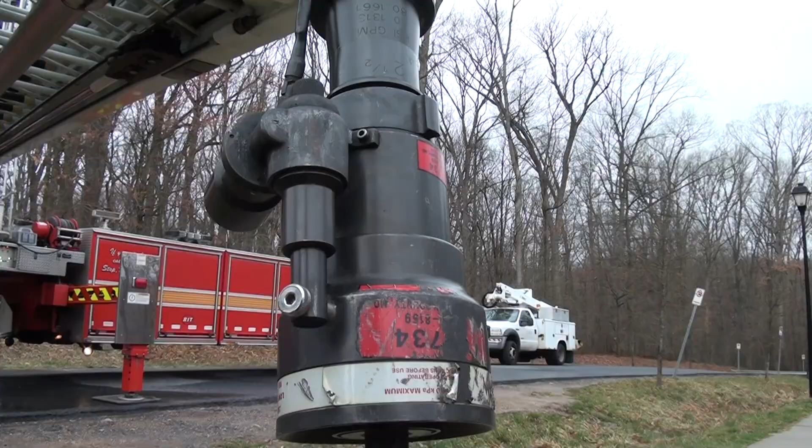In this video, we will discuss the various master stream devices utilized by the Montgomery County Fire Rescue Service. We will review what qualifies as a master stream, the types of master streams to include advantages and disadvantages of each, how to supply master stream devices, the differences in nozzle tips, and some operational best practices.

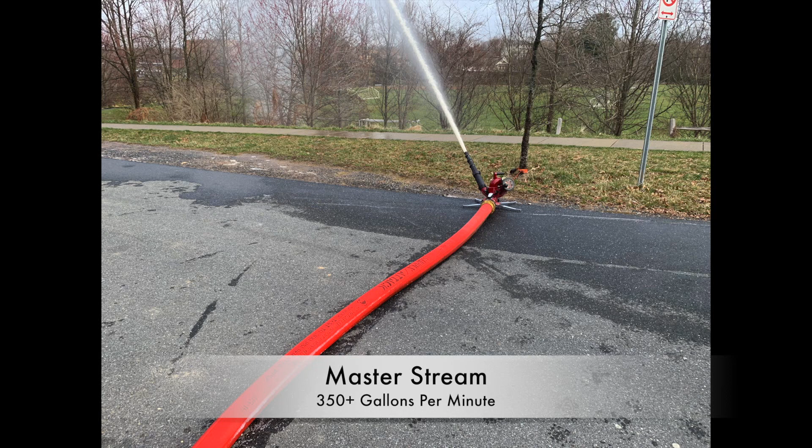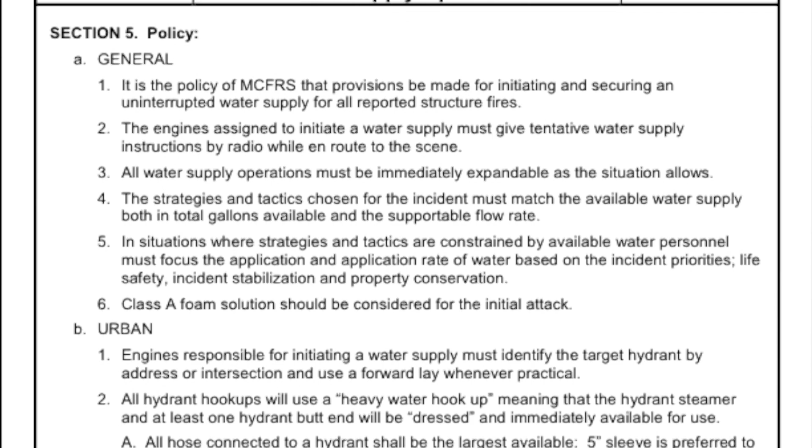According to the NFPA, a master stream is a stream of water flowing at least 350 gallons per minute. Master streams are ideal for when large amounts of water need to be quickly applied to burning surfaces or when arriving companies are faced with advanced, rapidly moving fire conditions. Officers and drivers are reminded that the IRP on water supply states that dual supply lines must be considered when master streams will be required for on-scene operations.

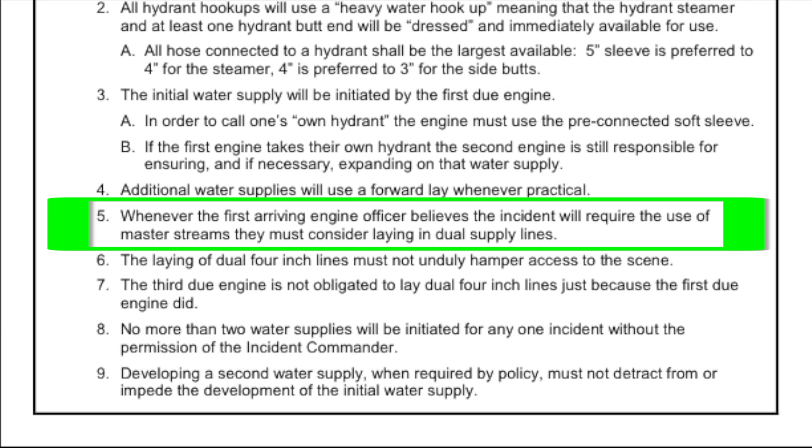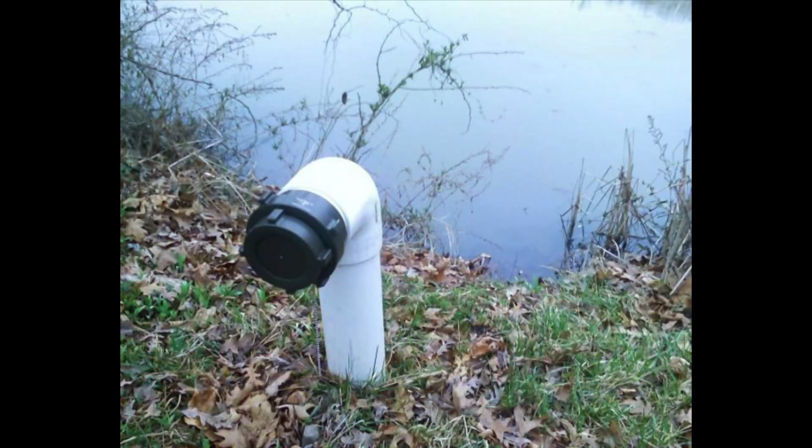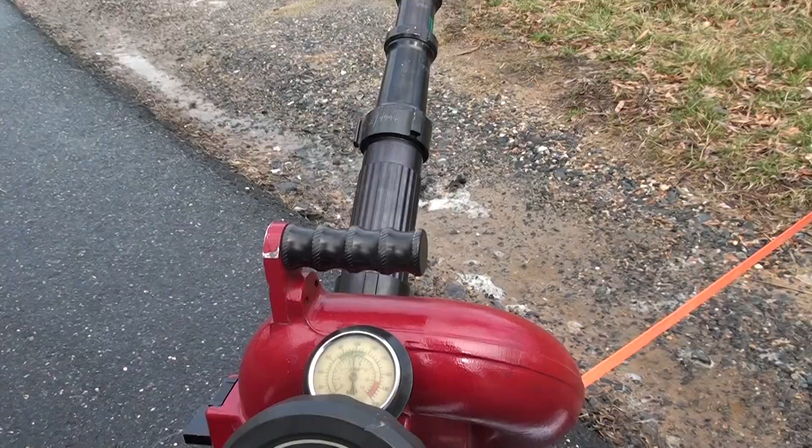Remember, strategies and tactics chosen for the incident must also match the available water supply. In a rural, non-hydranted area, a large master stream may not be practical until a continuous water supply is established. When connected to a hydrant, that hydrant may not have the gallons per minute to support multiple master streams, or a combination of a master stream and hand lines. Strategy and tactics should remain flexible to meet the unique challenges of each incident.

The various types of master streams include fixed, elevated, and portable. Fixed master streams are devices mounted to apparatus, such as deck guns found on engine companies. Elevated master streams are aerial ladders that are supplied by engines, and water is flowed from the nozzles mounted on the aerial device. Portable master streams include a variety of appliances found on heavy apparatus around the county.

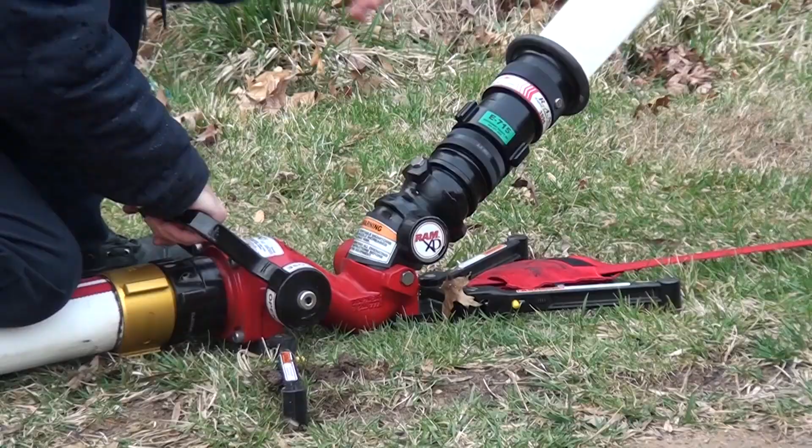Examples of these would include the Blitzfire, found on the Crimson engines, the Elkhart Ram, found on the Pierce Enforcer engines, and the Crossfire Monitor Base, found on various units throughout the county.

Advantages and disadvantages of master streams. Advantages. These master streams are able to deliver large quantities of water, up to 2,000 gallons per minute, when utilizing aerial towers. They have the ability to be used in both offensive and defensive fire suppression modes. They can be deployed and operated by one firefighter. In some instances, these streams can be left unattended.

They are very useful for exposure protection, cooling of large tanks, or rail cars involved in fire. They can be used to create a water barrier to control vapor release during hazardous material incidents. When used with a fog nozzle, these streams can be a useful tool for gross decontamination.

Disadvantages. Flowing large quantities of water into a structure adds a massive amount of weight to an already weakened and compromised structure. Along with the weight of the water being added to the structure, the force of the water being delivered into the structure can cause additional structural damage and instability. This may limit the ability to make entry inside.

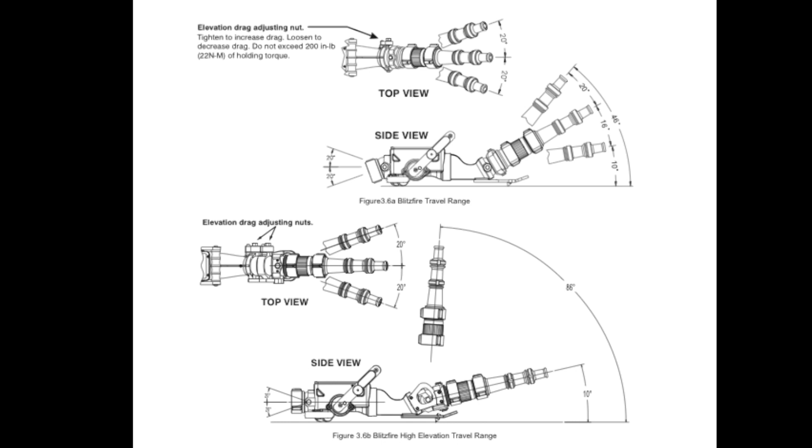Precautions. When utilizing a portable master stream device with an angle of delivery under 35 degrees, you increase the chance of a kickback if not properly secured. Many devices have safety features built in to reduce this likelihood. It is important to properly secure all nozzle tips on the device as they could become projectiles if not properly installed and tightened.

Supplying master stream devices. Depending on the incident and the type of device, the way in which it is supplied might be different. Fixed master stream devices, such as the deck gun, are supplied by the engine's fire pump and the various LDH intakes found on the unit. Elevated master streams are supplied by engine companies, pumping multiple 4-inch supply hoses into a large manifold, which is then connected to the ladder truck's waterway.

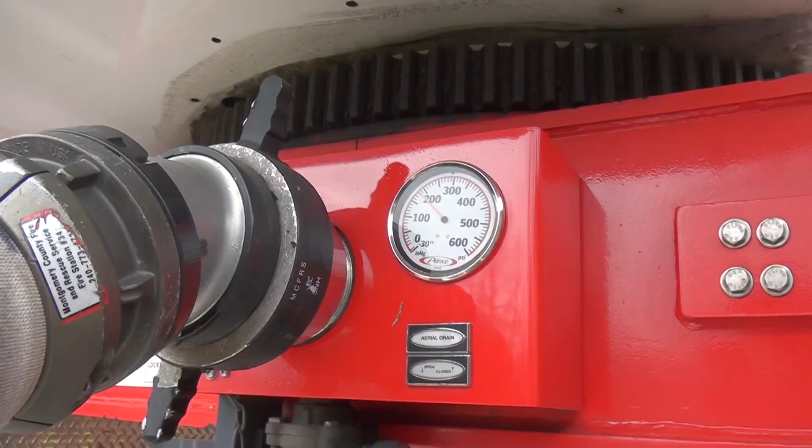Remember, it is important that the relief valve on the manifold or gate being used is properly set at 200 psi for correct flow of the aerial device.

On the Crimson engines, the Blitzfire is a pre-connected line off the rear and is supplied by 250 feet of 2.5-inch hose. While this combination is acceptable, companies should consider supplying the Blitzfire with 3-inch hose to maximize gallons per minute and increase effectiveness.

On the Pierce Arrow engines, the RAM is not pre-connected and must be built out. Like the Blitzfire, 3-inch hose is preferred for the RAM. The other portable master stream device in service on MCFRS units is the Task Force Tips Crossfire Monitor Base. This base is designed to receive the deck gun from the engines and is supplied by a single 4-inch hose.

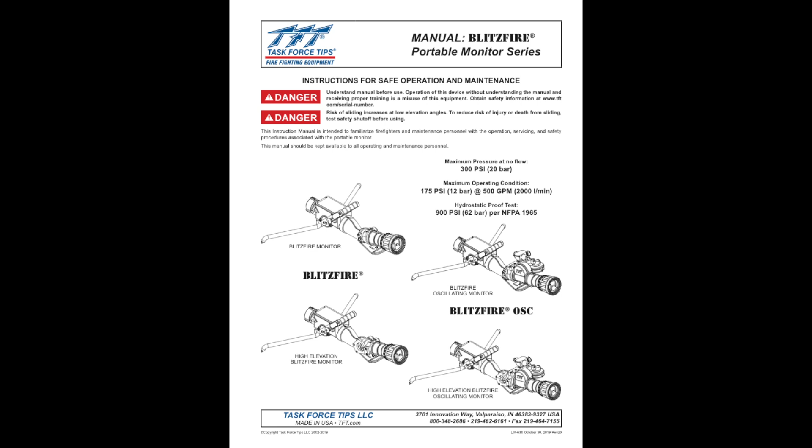Pump operators should know the limitations of the devices on their units and always follow manufacturers' recommendations for water flow and pressure. The forces involved with master stream devices make them extremely dangerous when not operated properly.

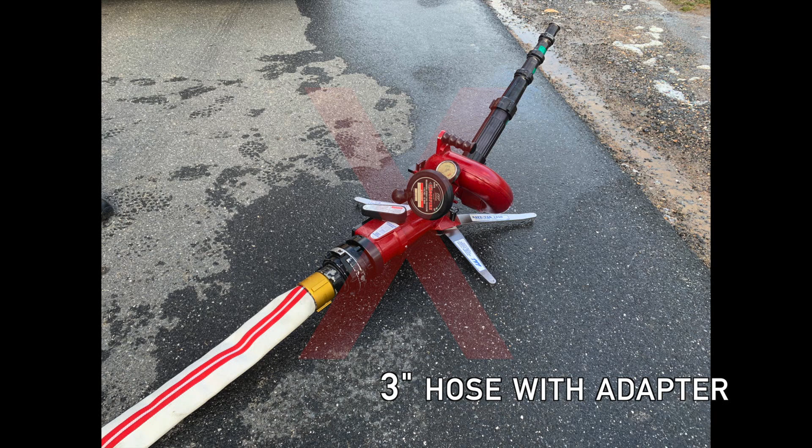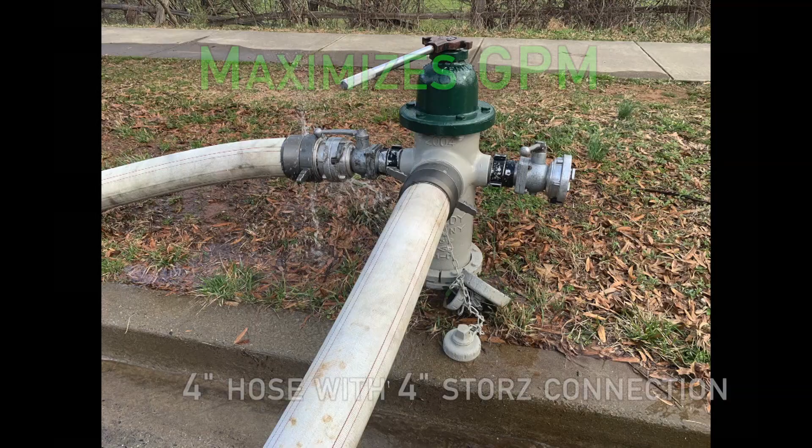Here are some tips to remember for supplying master stream devices. Use the largest size supply hose the appliance will accept. Ensure an adequate water supply to meet the needs of the incident and the device or devices. Think heavy water hookup or multiple engines on hydrants for multiple streams on large incidents. Place the device or aerial in a safe position, but in close proximity to the engine to reduce friction loss, thus maximizing flow.

Master stream nozzles. The smoothbore nozzle versus the fog nozzle. Each nozzle has its distinct advantages for different applications. Smoothbore nozzles have good penetration with good reach and distance, remembering that bigger tips do produce higher gallons per minute, but at a loss of range. Smoothbore nozzles are good at pushing or moving debris, and they're excellent for large volumes of water.

The fog nozzle is good for heat absorption and is good for exposure protection. It's an excellent choice for gross decontamination and other hazmat incidents. The fog nozzle provides for a larger coverage area than that of a smoothbore nozzle. Fog nozzle flows are dependent on manufacturer's specifics and recommendations, but in general, master streams utilizing fog nozzles should be pumped between 75 and 100 psi, which would provide a flow of 500 to 1200 gallons per minute.

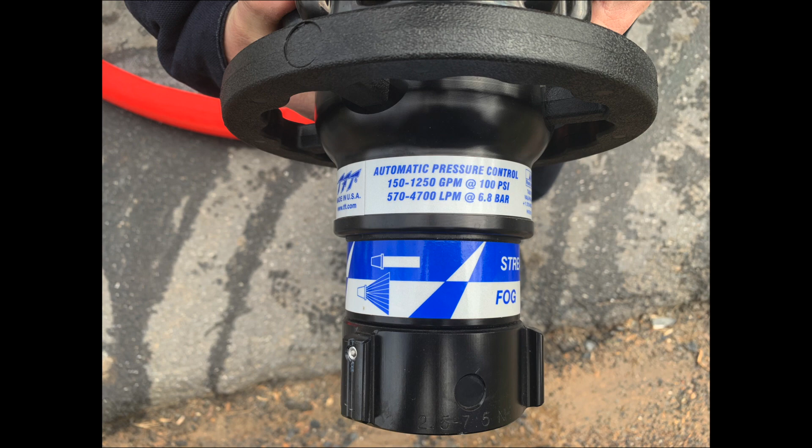Review the appliances on your unit to familiarize yourself with the operation and limitations of each of these devices.

Operational considerations. Never use master streams while crews are operating inside the structure. Master streams can be utilized in the offensive or defensive strategy. Portable master stream devices can be pre-connected or built out as an attack line. By removing the tip, crews can build an attack hand line from a master stream for mop-up after knocking down large volumes of fire.

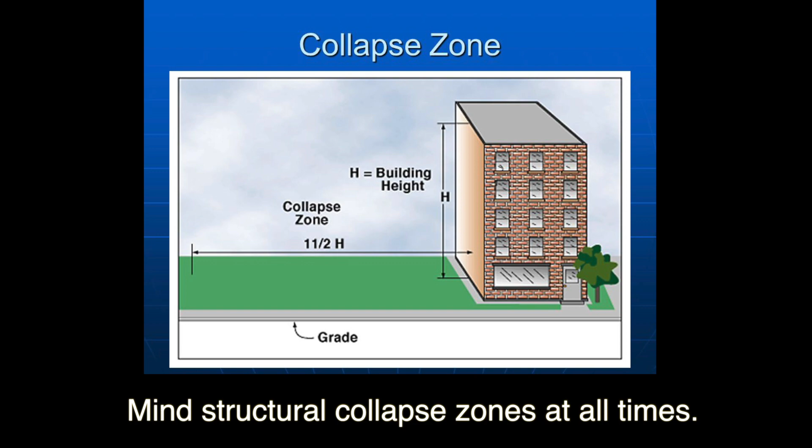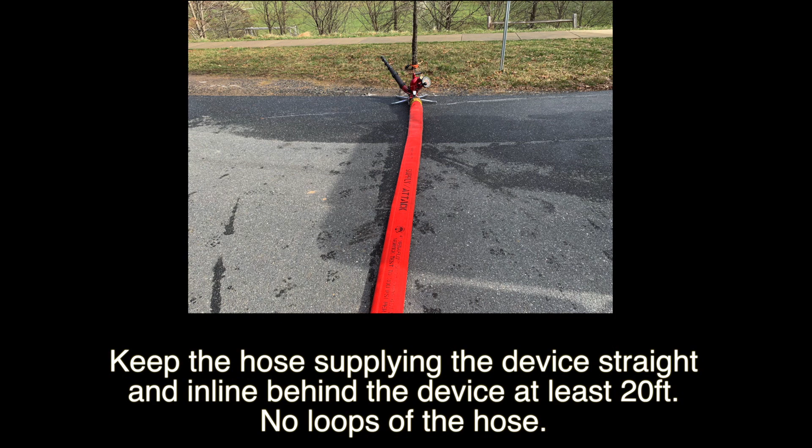When leading off with master streams and transitioning to interior attacks, officers must consider structural stability and the associated risks. Be mindful of structural collapse zones at all times. Keep the hose supplying the device straight and in line behind the device at least 20 feet. No loops of the hose. Always follow the manufacturer guidelines for use of various devices used by the MCFRS.

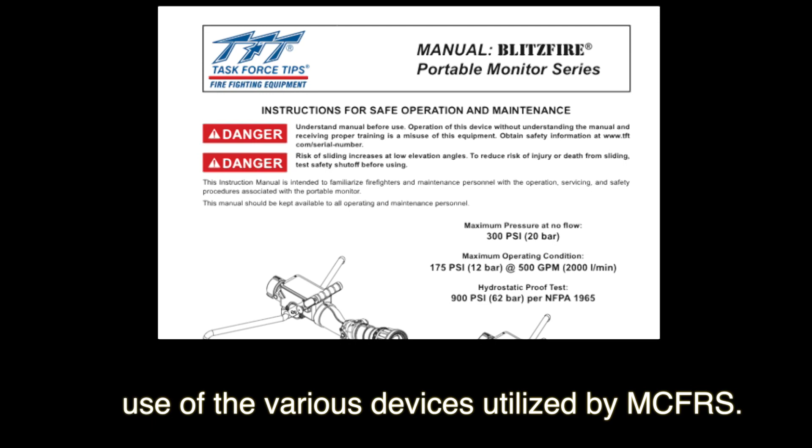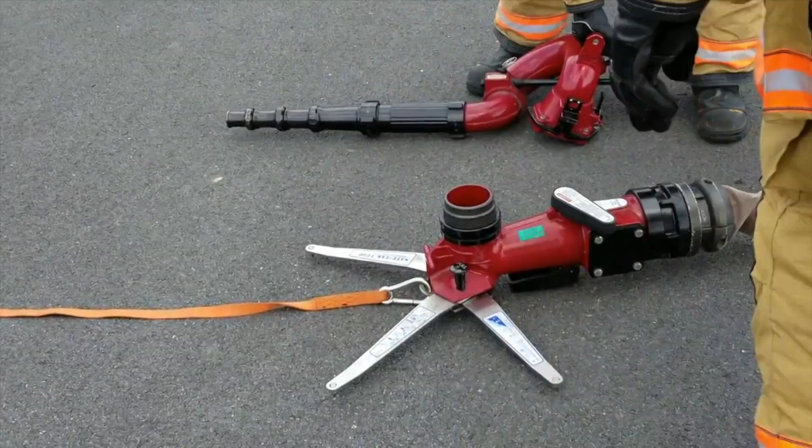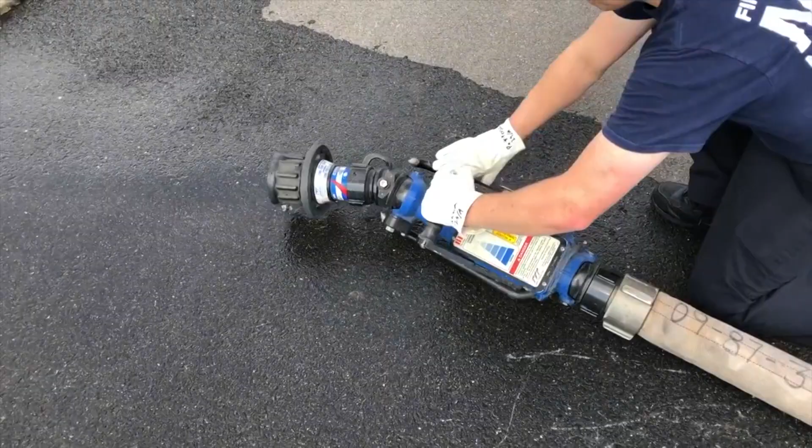Practical skills. Select an appropriate location that has a level, stable surface with the ability to secure a portable master stream device to a nearby sturdy object, if applicable. Safely deploy and set up all the master stream devices available at your company, following manufacturer guidelines and best business practices. Practice with the deck gun, the Blitzfire, the RAM, the Crossfire monitor, and an aerial master stream, if it's available to you. Review and discuss scenarios or target hazards within your response area that may present a need to utilize master stream devices.

This concludes this monthly basic training on the MCFRS master stream devices. All companies should become familiar with the various master stream devices in use throughout Montgomery County, and specifically those in use at their stations. Crews are encouraged to become proficient in deploying and using the various master stream devices at their stations. Companies should always refer to and follow the manufacturer's guidance found in the user's manuals for their specific devices. Thanks for watching.